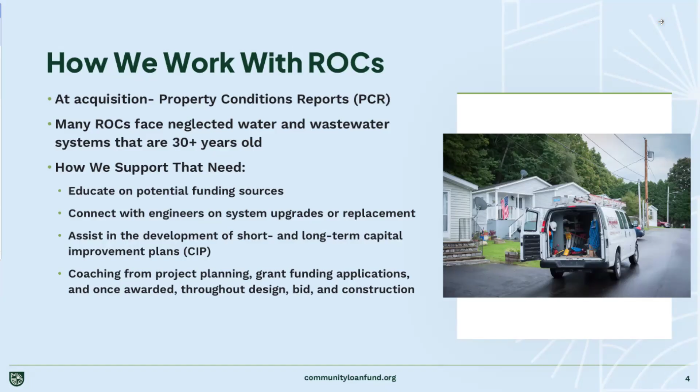We connect them with engineers for system upgrades and replacements and to help them fully understand the infrastructure they're responsible for, and to assist in capital improvement plans so they can be putting money away year over year to help maintain these systems. We provide coaching for all of that, the project planning, grant funding, and we can help people through design, bid, and construction.

Next slide. So the systems in resident-owned communities largely, some have municipal sewer systems. When you think about the closer density, the number of homes per acre, they do not set themselves up well for a traditional 1 to 2 acre lot that has an individual well and an individual septic system, which includes a leach field and tank.

They just don't, there isn't enough space to have high quality water and wastewater systems for that. So how do you really provide exactly what you need to protect the environment and have high quality systems in a much more dense environment? And these are great examples we can learn from.

So there are municipal systems in many, but over half of our communities have a private type wastewater system. And there is no typical private wastewater system. Your more traditional septic system might have a single tank and a single leach field for a home. That isn't very common in these systems. It happens sometimes, but it isn't super common.

What you see more often is what's in this picture, different configurations of cluster systems or shared wastewater systems. That includes each home having a tank, and then it goes to a shared leach field system, which you can see here. I think some of the engineers will get into a lot more detail later, so I'll keep mine high level. But that allows you to have a significant number of homes in a smaller area sharing one infrastructure, also overall reducing costs and being able to maintain shared systems instead of a bunch of individual systems.

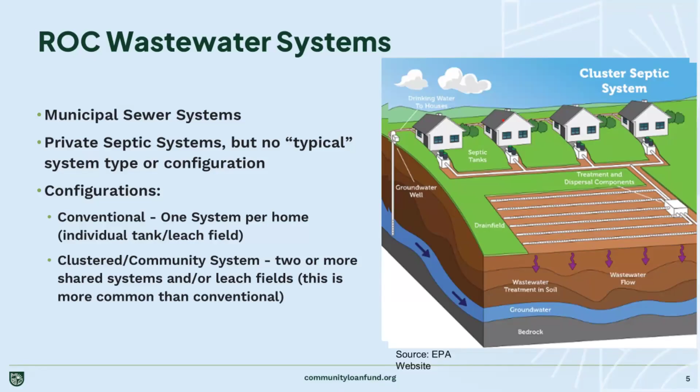And those are heavily regulated by New Hampshire DES as public water systems, just like your municipal system would be. They're not only responsible for replacing and maintaining all the water lines, but they're also responsible for regular testing to make sure that there's quality water being brought through the system. And the next slide is just some examples of what we're talking about.

So here's 4 different communities that we have recently worked with on improvements to either water or wastewater or both systems. Fox Hill in Franconia is 33 homes.

We helped them secure $100,000 through ARPA to offset the cost of wastewater system upgrades, specifically to replace the tanks because they had old steel and concrete septic tanks that were deteriorating and also weren't up to current code. So they have all new tanks now, and that project was completed at the end of last year.

And Mascoma Valley in Canaan, New Hampshire, we worked with them to help secure $1 million through ARPA for a whole septic system or wastewater system replacement, and then almost $1 million to upgrade their water distribution system. The septic work there is currently with DES and out for environmental review, and the project will be going out to bid soon, and it will be completed before June of 2026.

So these are important projects that have to move quickly. Catamount Hill is almost $1 million for leach field replacement. That is under construction, and it will be done this summer.

And Bunker Lane Condominium has quite the stack - lots of partners, some who are on this call, but CDBG funding, USDA RD funding, and ARPA funding for a total of $2.6 million in replacement dollars. The design of the water system is currently underway, while the septic system has been designed and went out for bid, but only got one bid, and it was above the amount of money they have. So we're working again with DES, the board of directors and engineers to figure out what's the next step to make sure that those systems get improved.

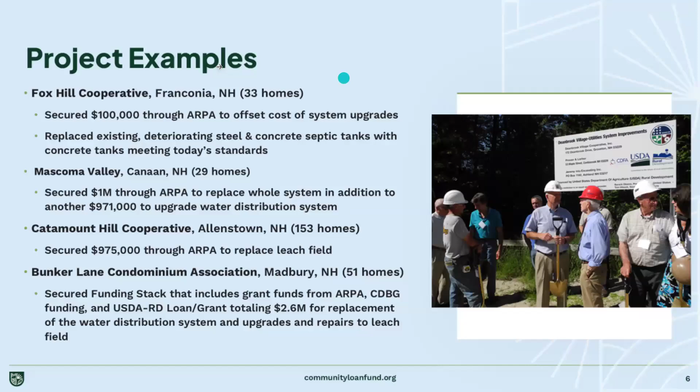Thank you, Ellen. And I just want to say that was really interesting hearing about Sarah's work. I love the idea of these sort of small mini local democracies existing in some of these housing projects. That really spoke to me in many ways. So I just wanted to say that's pretty great.

So my name is Alex Torpey. I am the founder and president of Rethink Local.

My coming into this topic a little bit is actually - I'm coming to you from the house that I am currently midway building in the Upper Valley. I came to this not from my prior role as a town manager in Hartford or other towns in New Jersey where I'm from, where actually all the towns in New Jersey, 100% of our residents were on municipal water and sewer systems. So I didn't have a ton of exposure to this until coming to the Upper Valley, and I really didn't have exposure to it until I started building my own house in a rural area with no water or wastewater.

So I had some questions about some of that. I had reached out to one of the state reps in the area, Monique Priestley. She connected me to folks at the state - Bruce is on the call, and his colleagues at DES, Brian and David - and we just had a really enlightening and interesting conversation about some of these things that I have also worked on with some of the local stakeholders.

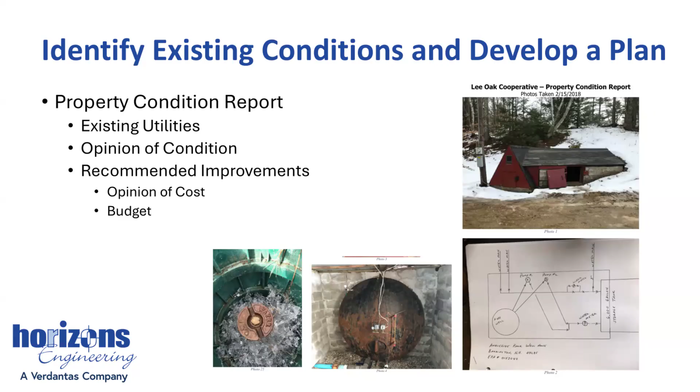Another way of identifying existing conditions, a little more detailed, is the preliminary engineering report. Whether you've got an existing site with existing infrastructure giving you maintenance issues, or you're looking to develop a new site, it's always important to understand what the soils and elevations are like, because all of that is important in the costing and development of systems.

A preliminary engineering report takes things a step further beyond the property condition report. We look at the need for the project — why are we doing this project, why do we need to do it? Do you have poor water quality? Do you have failed leach fields?

We also consider the alternatives. As Alex talked about, we want to find the alternative that best matches your needs. Each site is different, each entity is a little different, so we make sure we're considering all the alternatives that might make sense for your community. Just because municipal water might be 2 miles away doesn't mean that's not still the best alternative. This preliminary engineering report gives us the opportunity to look at all those alternatives, come up with a recommendation, and again, the cost and operating budget.

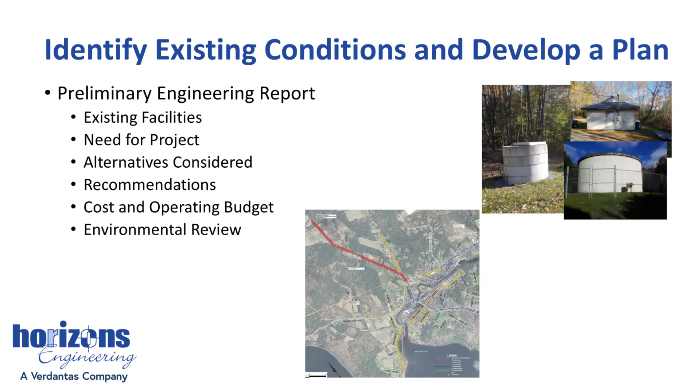The other way to identify conditions, a bit more involved, is called asset management planning. These water and sewer systems are valuable assets. We look at the risk of failure, the age, and the importance of that component of the system. We still do the same basics regardless of which process we're taking — we look at the utilities and their condition. Here we develop a capital improvement plan and an asset management strategy, and financial planning is always important, since these are big investments for people.

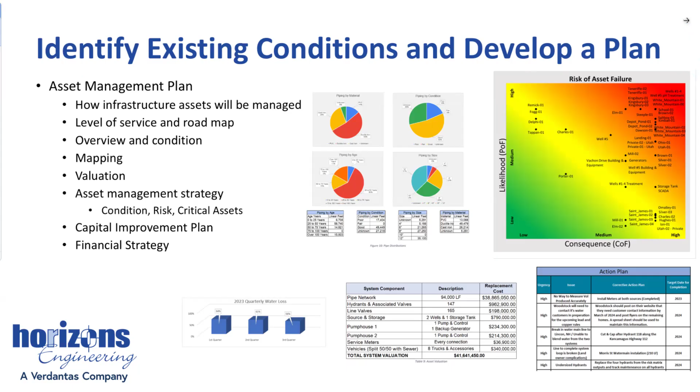I wanted to spend a little time on a couple of case studies. This particular project, Lee Oak Mobile Home Park in Barrington, is a ROC-NH project that Sarah mentioned along with some other projects. When we got involved, the very first thing we did was a property condition report so we could understand what was going on with the infrastructure.

As part of that, surveys are completed by each resident, so we learn things like 'my water has a metallic taste' or 'it's leaving rust stains on my fixtures.' Those things are important for us to know. This particular property has about 44 acres and 77 house sites, and it has what's called a community public water system.

It had a single dug well, which was too close to leach fields and too close to wetlands. So you started having surface water influencing it, and it didn't meet any of the regulations it needed to meet. The distribution main was a 1.5 to 3 inch plastic pipe, some of it undersized. The storage was no atmospheric storage, just pressure storage. That property condition report gave us the background so we could understand what was going on with this system and make some recommendations for improvements.

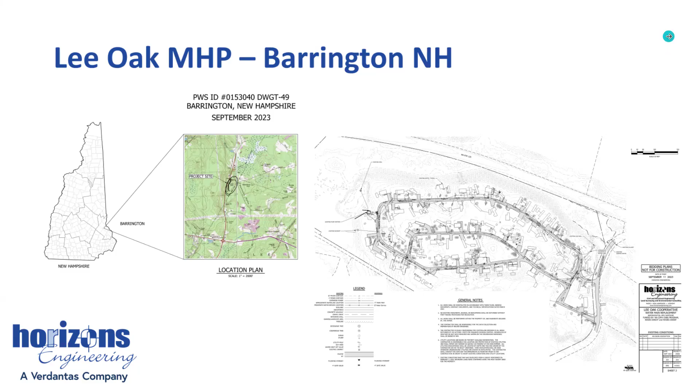So basically what we wound up doing for this site was a whole new system. The water main, shown on the left-hand side, we replaced that undersized water main with a 4-inch water main, and we added gate valves because oftentimes with these older systems you couldn't isolate them. So if you had a break, everybody was out of water, which creates issues for the folks.

We also did a new pump station. The picture in the upper right-hand corner shows that pump station under construction. Again, looking at alternative ways to do things, we used concrete tanks as the foundation of this building, which provides the atmospheric storage we need. So we've got 20,000 gallons of storage underneath this building, and within the building we have a small pressure tank. In the past, we would bury these big steel tanks with the tank sticking through the foundation, but this is a way we're trying to value engineer these projects for these communities. The last piece of this project was the development of a new well.

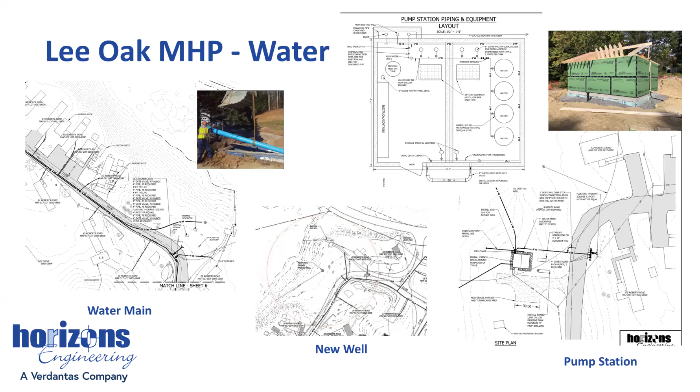We needed to replace that source, which was not great. Regulations require that they have 2 wells, so we're going to keep the other one online as a backup. This was the work we had done on the water system for this park. It was roughly a $2.5 million project that had funding from ARPA, CDBG, Drinking Water SRF, and the Drinking Water Groundwater Trust Fund. So it was a package of funding sources that made this happen for this community.

Okay, I thought I had a wastewater slide in there. So as part of that $2.5 million project, there were also some leach fields that needed to be replaced. We replaced about 7 of the systems that were in the worst condition, and those, as Sarah talked about, were community systems that served 1 or 2 homes so that we could fit them in the tight area.

This slide is another example of another mobile home park that we worked with. This one is in Hill, New Hampshire. It has 20 homes on it, and this particular system is connected to the Hill Waterworks municipal water system. It's got 2-inch diameter pipe that's about 40 years old, but seems to be holding up pretty well.

But the issues here were the wastewater systems. Each home had its own system, and the soils were generally sandy and good, but the systems had been in for 40 to 50 years, and maintenance wasn't always done. People didn't understand the need to pump the tanks every couple of years, so the systems started to fail. Maybe they started getting mounding of water, and septic tanks are now larger than they were 40 years ago. So there were a lot of reasons these systems started to fail.

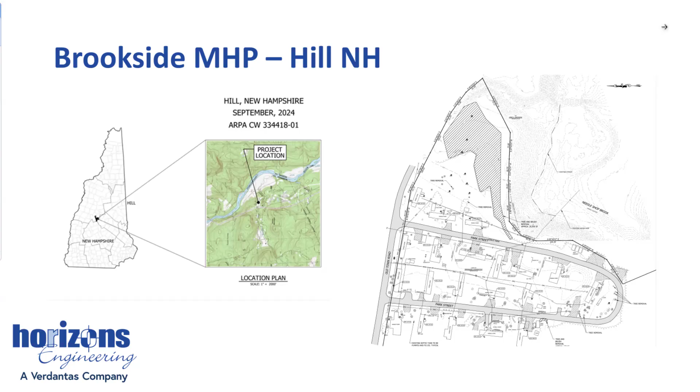Our initial plan to resolve the issue, shown in the upper part of this picture, was to look at installing community leach fields. This facility had some open area we could utilize. So instead of each of the homes around that loop road at the bottom of this photo having their own systems, we would put a sewer main in the street, bring it to a pump station at the low point at the bottom of that loop, and then pump it up into this community leach field.

One of the reasons you can see multiple fields in this leach field is that when you get to larger systems, sometimes it's harder to fit them into an area because of nitrate setbacks. So it's kind of like putting a puzzle piece together—how do you fit these in the best way, maintain nitrate setbacks on the property if you can't get a down gradient easement, and other things like that. So this was our plan A. We developed this plan with support from the homeowners, a couple of local contractors, DES, and then did an estimate.

And it was considerably more money than they had available. So we then had to go to Plan B, which is the next slide. Whoops. I'm not sure what happened to my wastewater slides, but anyway, so Plan B was, if we could go just back for a minute, Ellen, if you don't mind. Okay. So Plan B was down in this lower area where the road is in the existing mobile homes.

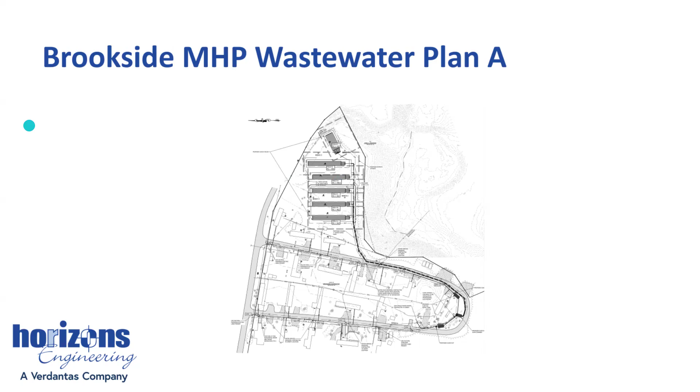Fine. Yeah, really helpful to just kind of understand the whole thought process and evaluation that happens as you think about designing these systems, and then sometimes how the cost means you have to go with a different plan. And yeah, really helpful to kind of hear how that all plays out.

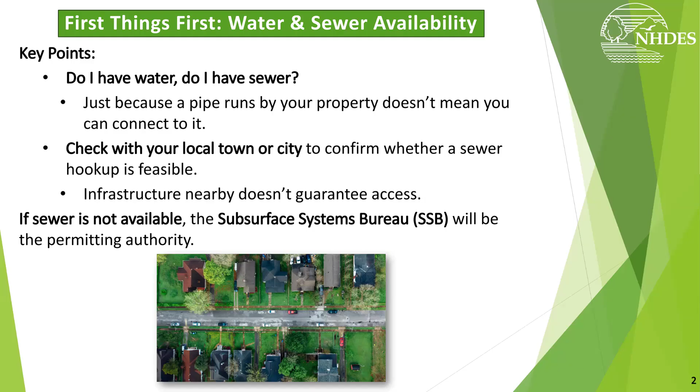So the SSB issues 2 types of approvals. One is a construction approval and the other is an operational approval. The construction approval is issued after a septic design is submitted by an ISDS permitted designer, which then goes to Concord and is reviewed by plan review staff here. And once that is all good, they give you approval for 4 years.

Then you're given the operational approval after the design's been approved and a permitted New Hampshire septic installer installs the septic, and then an NHDES regional inspector comes out and confirms that everything was installed per the plan, and then you are issued the operational approval. So the operational approval is valid until a change of use, flow, or other qualifying changes to the property occur. So it's important to note, if the property has separate leach fields and septic tanks, then an additional construction and operational approval may be required. Next slide.

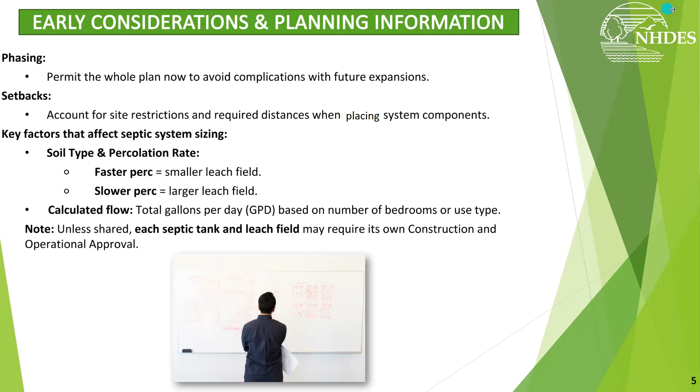So the calculated flow for residences is primarily based on the number of bedrooms in the home. So for 2 bedrooms, it's 300 gallons per day, 3 bedrooms, 450. Then each additional bedroom adds 150 gallons per day, though the minimum design flow is 300 gallons per day, even in small homes. Studio apartments and 1-bedroom apartments are calculated at 225 gallons per day.

So I have shown here Table 1008.1 from Env-Wq 1000, which is our administrative rules. So if you search that or click on the link, it'll bring you to our administrative rule book. In my following slides, I have additional tables and stuff, but that's really the main bulk of our rules and regulations as far as developing in New Hampshire.

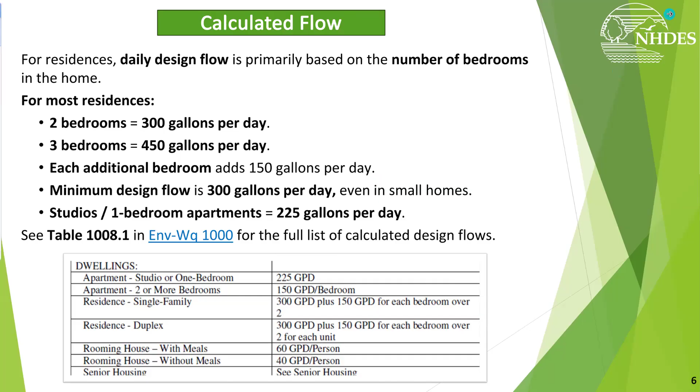is worse. So on a 2-bedroom home on a level flat piece of land with group 1 soils, the minimum lot size is 1 acre, while that same home on a level lot with group 5 soils, you're going to need 3 acres to build. So same kind of thing with the key factors: poor soil, you need a bigger lot size; more bedrooms, larger required lot size; and steeper slopes is also a larger required lot size.

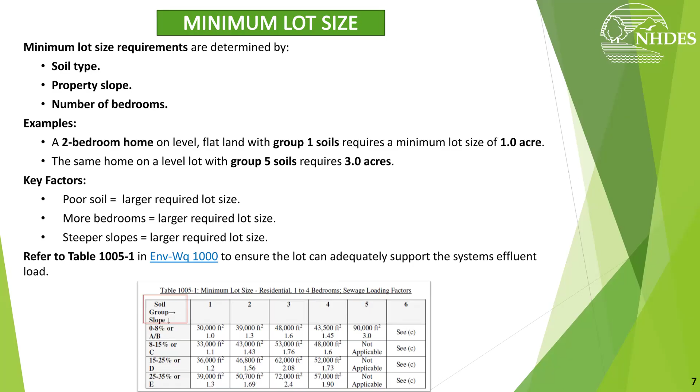So if you go to that website, it'll bring up the map, and then you can zoom in and really zone into just your property, and then you create this area of interest around it. And then from there, it'll break it out and tell you the average slopes, general soil characteristics, as well as the drainage class and what you might see on site there. But again, this could vary from what actually is being seen.

So when you get a designer to go out there and they dig a test pit, it could vary from what is being shown on this website, but it's a very handy tool. And if you use that in combination with some of our other tables in our administrative rules, it can give you a pretty good idea of the lot size you need and other things.

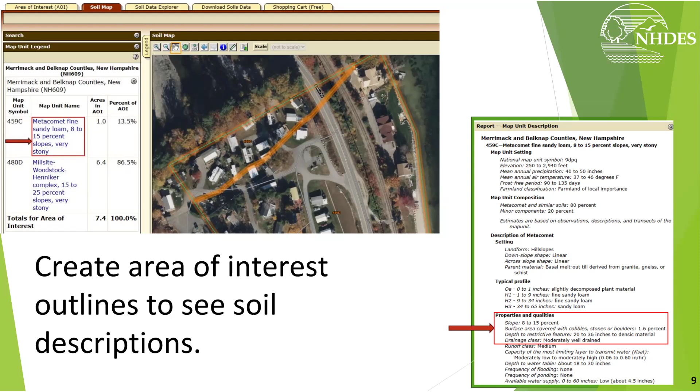So we calculate the leach field sizing based on your calculated daily design flow as well as the percolation rate of the soil. So if you look at this table here, a 2-bedroom house with a 2-minute perc rate would require a 400 square foot stone and pipe leach field. That same size home with a 14-minute perc rate needs 637 square feet of stone and pipe. So a slower perc rate, larger leach field.

And you may have discussed on your other ones alternate technologies. So in New Hampshire, we have the Presbys and Infiltrator and a few other systems. Those are approved alternative technologies, and those have their own set of rules as far as leach field sizing and how those are calculated.

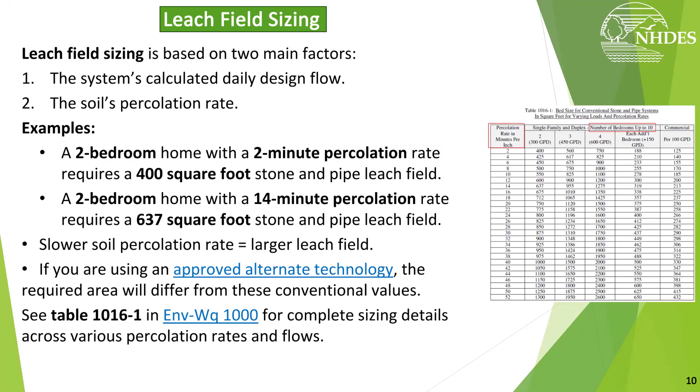So then everything has its own required distance. So in table 1008-2, we have the features as well as the components. A septic tank, the leach field bed, and the sewer line could all have different setbacks to certain things. They might not all be the same. So if you think of a pressure water line, the septic tank's 10 feet away, the bed has to be 25, and the sewer line 10. So if you are referencing that table, just make sure that you're looking at the different system components.

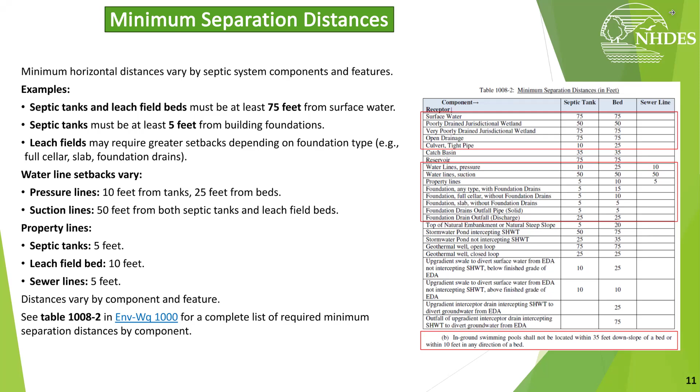And then the final thing that comes into play with planning is the well radius. The way we calculate the well radius is your daily sewage flow, gallons per day. So if you have a 2-bedroom house, which is 300 gallons a day, you have to maintain a 75-foot protective radius from the center of the well outwards. And say a 6-bedroom, which kicks you into 900 gallons, brings you to the next level of protection, which has to be a 100-foot radius.

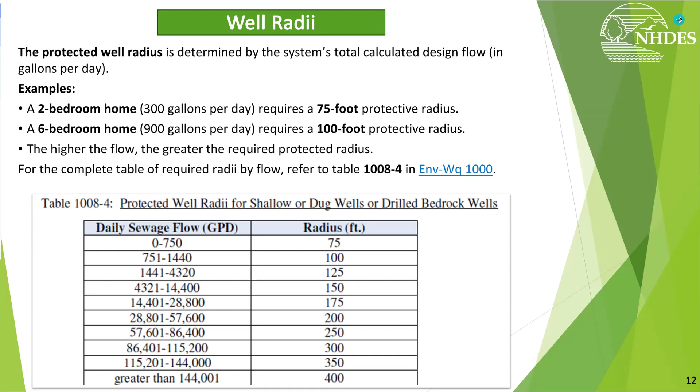And I believe Ted's going to take over from here for a few. Just in the nick of time.

So I'm going to talk really quickly about wells. With private wells, if you're going to drill your own well, New Hampshire doesn't regulate those per se, but we do regulate them through the location, as Dale just talked about, like where they can end up on the lot, setbacks, things like that. We regulate the construction, and we regulate the pump installation through the well drillers and pump installers. So we basically license them. We have a set of rules, and they adhere to those rules.

So like Alex talked about, these lists of people who are qualified to do this work, we do have those lists for licensed septic installers and designers, as well as licensed well drillers and pump installers. Those do exist, but I understand the frustration of not knowing anything about those individuals. That really is word of mouth. Having recently built a house in a small community, I'll say that local Facebook pages are awesome for finding those kinds of things out. We've gotten connected with some very good contractors of different sorts that way.

I think a lot of people are tempted, because we are a wet state, to say, hey, I got a pond, I'll just drink some of that. We highly discourage this. It's not illegal if you want to drink your own pond, but it definitely is highly discouraged, and a very good way to end up with some pretty bad diseases that are naturally occurring in the environment.

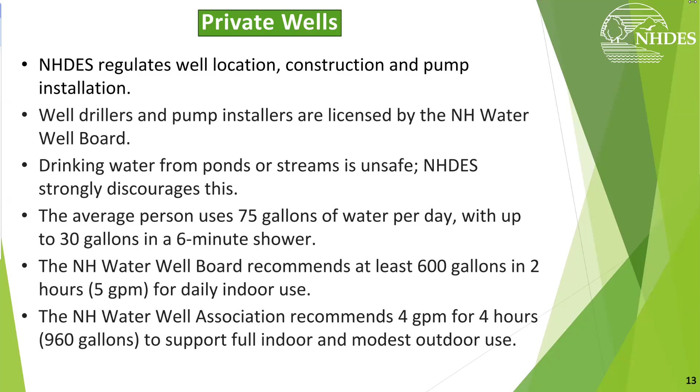So we talked about public water supplies being a more efficient way of having multiple systems, multiple people together. We have about 2,500 public water systems in New Hampshire, and basically you're a public water system if you're serving 15 connections or more. If you're less than that, you may still be considered a public water system if you share components or if you have shared ownership. So like some of the ROCs we heard about earlier, those are places in which, because they're under a condo association or under the co-op, they would generally be regulated as a public water system.

And then between a public water system, if you're a community water system, you end up in some different ways of how we regulate you, different levels of regulation. The community water system has significant requirements because what's more important to your safety than the water you drink? So if you're going to go into the world of having a community water system that serves your housing, you really do have to make sure you're applying these rules and making sure that you're safe. Lots of reporting and monitoring - that's how we keep people safe.

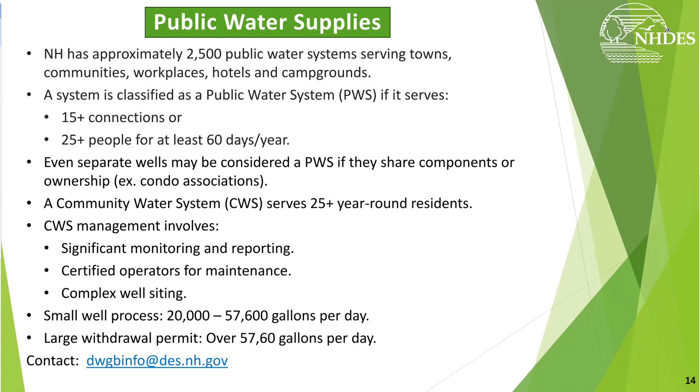Connecting to a public water or wastewater system, there's a lot of variables that go into capacity calculations for both water and wastewater. One of the things is that we often don't allow an individual or a new development to go directly into a force main. So oftentimes they will need a pump station, which will take them to another pump station or into a gravity well or something like that.

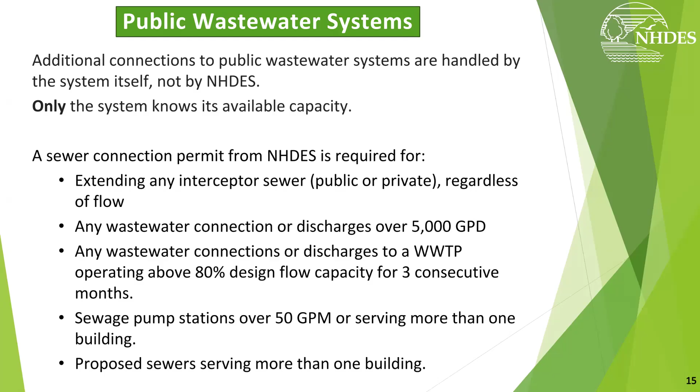There's also limitations on the treatment side. We know that there are a lot of facilities that are really close on their effluent limits for something like biological oxygen demand or ammonia. So adding new capacity, even if they have big pipes and big pumps and it's no problem to handle the capacity, they may actually have effluent requirements that are causing those constrictions. So this is something that has to happen if you're thinking about being near a public wastewater system - you have to have early conversations with those folks to make sure they've addressed all of those different kinds of things. Some of those aspects may be required to have design review and permitting by DES.

Next slide, please. So this is really just some of the questions - we just put this out there. I know you're going to make these available, but these are some of the questions that I would be asking if I were going to be trying to hook up to public wastewater systems. So these are just a little checklist.

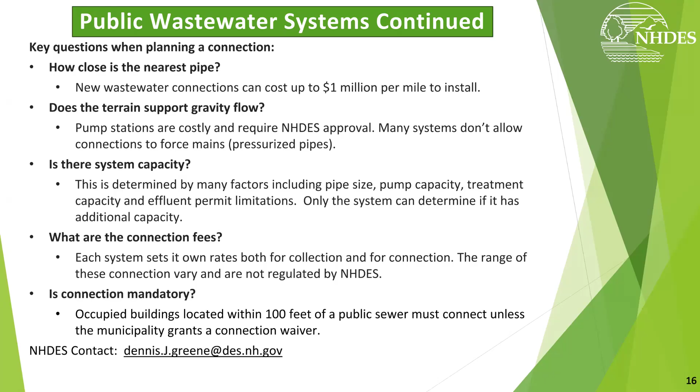Final and last slide, please. It may be that you need to go into other bureaus, and I don't know, Dale, if you want to talk about this or not, but DES has lots of different parts. There's lots of different regulations that can come in under different aspects of your development projects. So take it away, Dale.

Yep, thank you. So the Subsurface Bureau, or SSB, handles most of the septic permits. But say if your calculated design flow is greater than 10,000 gallons per day, then the Wastewater Engineering Bureau will be involved. If you're within 250 feet of a protected shoreland or near wetlands, the Wetlands and Shoreland Bureau is going to be involved, as well as water supply permits.

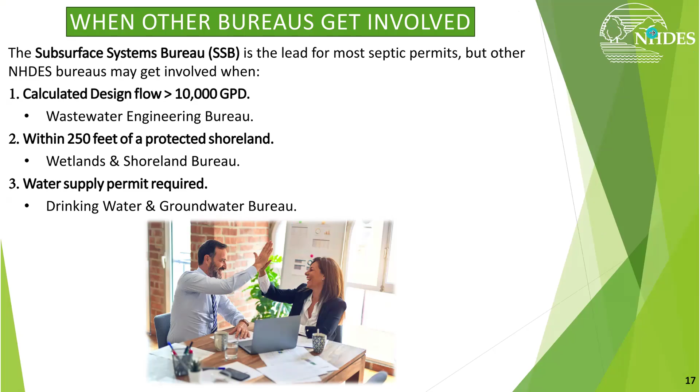Next slide. So that's just some information. I believe the slides are available, but those are some more information on when to get them, how to get in contact with them.

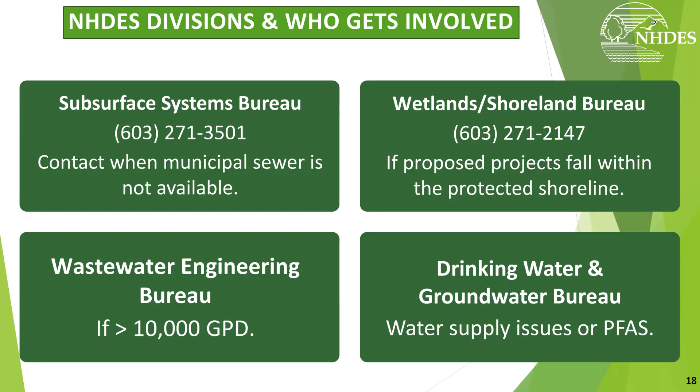And yeah, greatly appreciate the opportunity to be here and hope everyone found that helpful.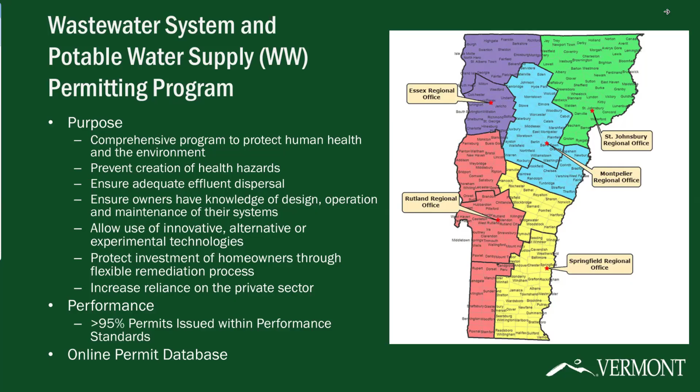This was interesting - Cathy was very, very helpful. It's kind of like what a typical engineering approach is to a large project. I'm going to focus on the smaller scale, more of a homeowner or small subdivision approach, which is hopefully a useful contrast. So the landowner establishes what they want to do, then hires a licensed designer. The designer has to take those landowners' goals and objectives and get more specific relative to what project they can provide, with the land available, in a very conceptual sense, but also come up with the design flows as Dale explained.

New Hampshire has very specific design flows. Vermont has its own table, a couple of pages long, with our breakdown of design flows. But for residential housing, we're both using bedrooms, and we just have a different way of applying those bedrooms to come up with a design flow relative to project scope.

I'm going to start with water supplies and work into the wastewater, because we all need water. As Ted was saying, you've got to have healthy, clean water, and so we need to provide that in adequate quantity and quality.

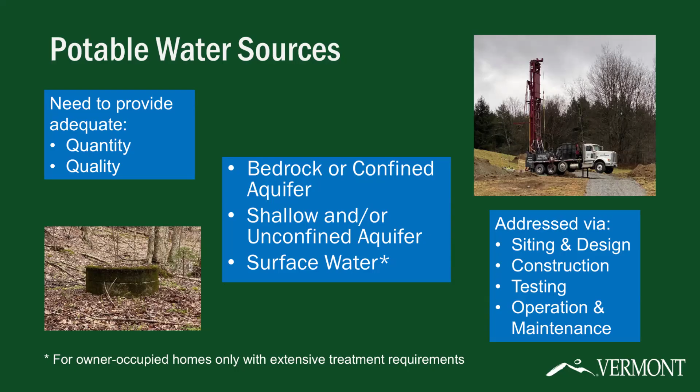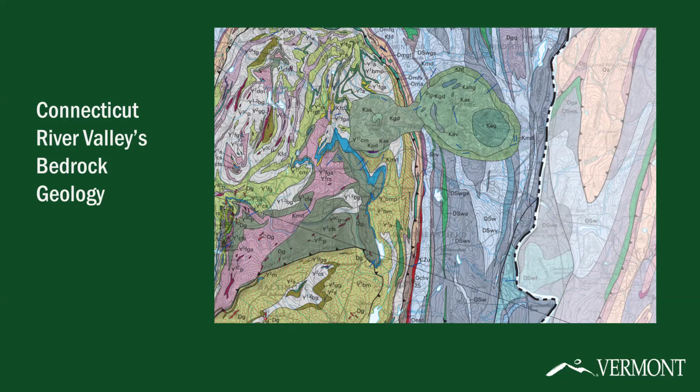I really like that Dale showed the web soil survey, because that's the highest level of planning scale mapping available. So that's the next level—you go from surficial geology, to the soil surveys, then to the site investigation.

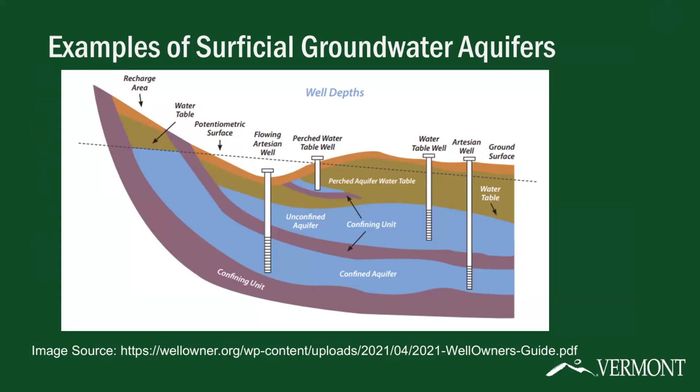Maintenance is key. You need to protect your well from parking cars or getting hit by a turning UPS truck or whatnot. You want to prevent contamination by being cautious of what you're doing on your lawn and in the vicinity of the well, and what your neighbors might be doing. You want to inspect it to make sure the well cap isn't broken or loose so critters can't get in, practice good water use habits and appliances, keep your records in a safe place, and use qualified professionals.

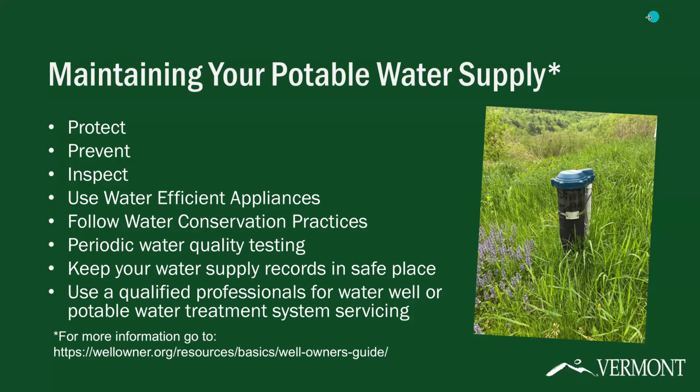Soil-based wastewater systems are very elegant solutions to a problem—they've been around for decades. Back in the 1920s, the perk test was developed by a sanitary engineer in New York State. Vermont did abandon the percolation test in 2023. We had it for a long time, and now we use what we call soil morphology to determine the suitability and characteristics of the soil in place, which we design our systems based on.

We basically need to use the soil and infrastructure to get treatment and dispersal, while protecting sensitive receptors like drinking water supplies, groundwater, and surface water. The available components we have include source separation—not commonly used, but out there—like a composting toilet that can reduce the flow to a leach field. Then there's the septic tank, which is a slow primary treatment tank. It separates floatables and sinkables, leaving a relatively clear liquid we call septic tank effluent, which goes to the leach field. That slow decomposition decreases the volume of solids that need to be removed, which is why you don't have to pump it except on the order of years, because of that decomposition and consolidation of solids.

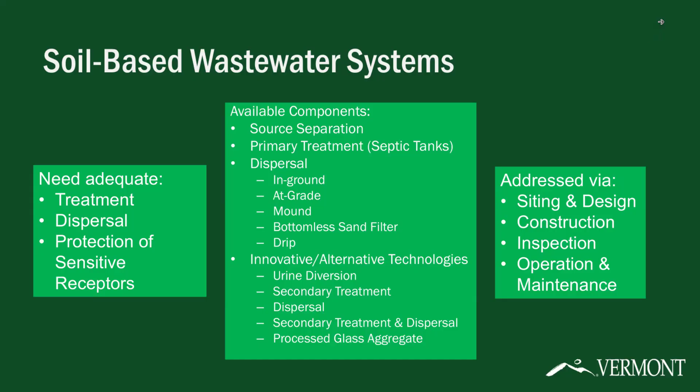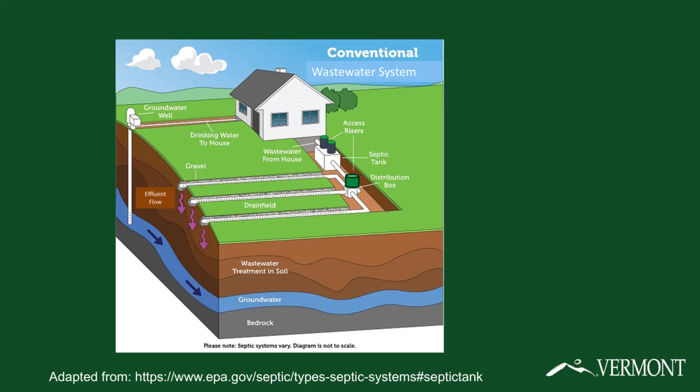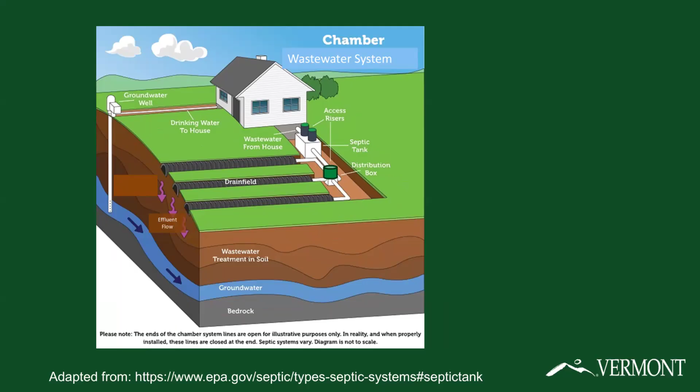So a chamber system uses the infiltrator that Dale mentioned. Plastic pipes rather than sand and gravel might be useful if you've got a narrow backyard and can't get a big dump truck back there, and you can carry your drain field equipment out instead.

The mound system - this is kind of EPA's adapted version, but it was developed in Wisconsin, at the University of Wisconsin, after the governor got sick from a pathogen he got from a septic system contaminating a well at, I think, a county fair in the 70s. So there's a raft of information, and they studied how treatment can be optimized in soil in specified fill, and came up with the mound system.

So Vermont uses the Wisconsin mound design. It's a very simple system, low profile. The only additional thing is you're adding a pump to pressurize it for good even distribution, and adding that sand for consistent treatment and acceptance. It has a relatively small footprint for acceptance. Overall, I want to say these systems are elegant from an engineering standpoint because they're well thought out, technically sound, and can be installed in a variety of settings within the design criteria, but they also have low maintenance, and that's key to what homeowners appreciate. They want a system they don't necessarily have to tend - most homeowners don't want to take care of their wastewater system.

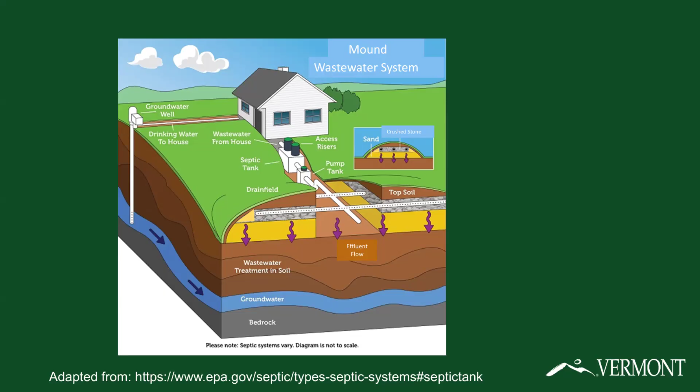Drip is becoming very, very common. It has a lower profile. It's basically a pipe the size of my finger, with small orifices about 1 to 2 feet apart, and it gets nice even distribution without requiring the depth of a stone-and-pipe trench or chamber.

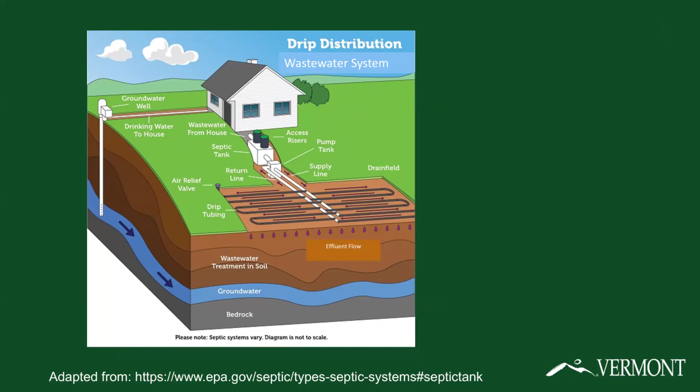This is a slide we've already seen, but basically multiple septic tanks can work together - it doesn't have to be a manufactured housing community, it can be a neighborhood or a cluster of houses.

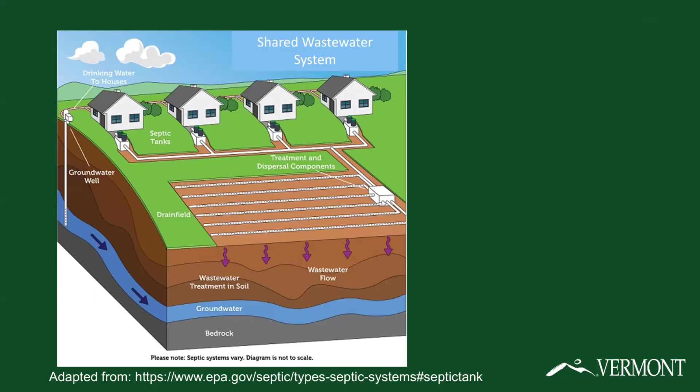So the specific design steps: the designer will do a site and soil evaluation, picking the area relative to the owner's needs that's available for a potential leach field, separated from the water supply on the site and neighbors' water supplies. Then there are test pits, hopefully with fewer people than five - but this is a training session for our regional engineer staff. They're describing soil characteristics and coming up with depth of seasonal high water table, and also application rates - the low, medium, and high perc rates Dale was referring to - and looking at topography to see where the system fits in, and any other natural and cultural features you need to separate your wastewater system from.

Run that by the landowner, prepare the plans and supporting information and the permit application. The landowner signs the application, provides the fee, and the designer submits it online on the landowner's behalf.

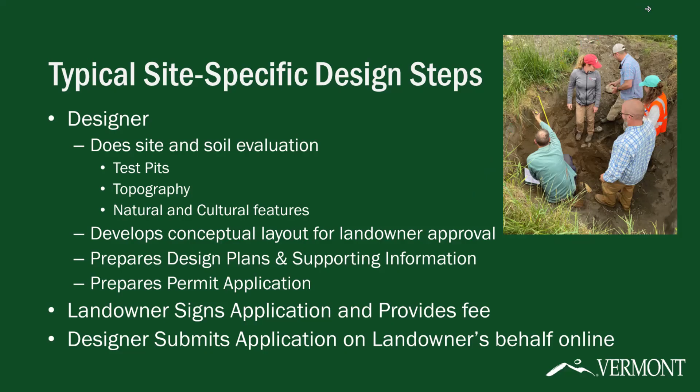And so the permit's recorded in the municipal land records by the landowner. It's available to the public in an online searchable database. I wish I had a QR code. I love that. Here's a designer testing a pressure distribution system, to show even distribution. But you need that designer involved in the installation, because A, they have to stake it out, and B, they have to certify that it was installed correctly.

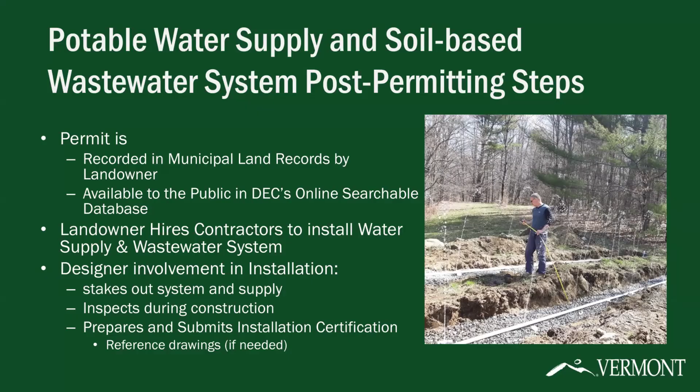Maintenance is big. Know your permit conditions. Make sure you know what you're required to do if you're buying property or you get a permit for a property that you own. Don't drive on your wastewater system components. They're typically not built for vehicle weight loads. Inspect it. Make sure if you have any risers exposed that they're always tight and secure. You don't want anyone inadvertently opening those and falling in.

If you have a control panel, have that inspected. Make sure it doesn't have a wasp nest growing in it, so if you need it, you can get to it. Don't put excessive fat, oil, and grease down the drain. That's one of the most problematic things for a wastewater system. The decomposition of those is not what the septic tank is built for. And do periodic pumping. Know if you need to have annual inspections, keep your records, and use qualified professionals.